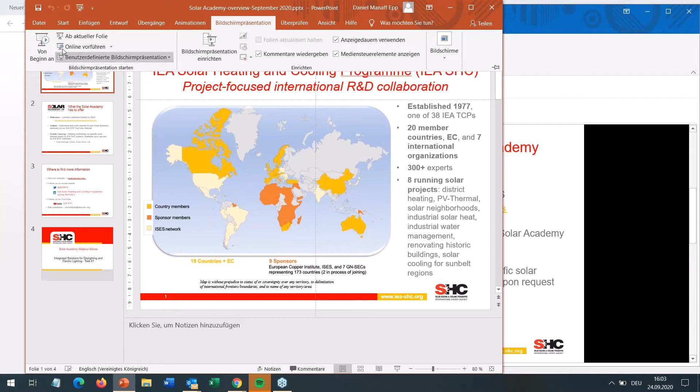The IEA Solar Heating and Cooling Program is a collaborative research platform, really huge, with over 300 experts from around the world, from 20 member countries, the EC, and 7 international organizations. We have currently 8 running research projects, and they cover a wide range of topics which are all linked with efficiency and solar energy. It's district heating, PV thermal, solar neighborhood, industrial solar heat, renovation buildings, solar cooling for Sunbelt regions.

What we offer as Solar Academy is regular webinars. They are hosted with ISES. You hear one today, and you find all the recordings of previous webinars under this link. Also, we offer videos on the YouTube channel, which we have done with experts on conferences or around Solar Academy webinars. And we offer on-site training available on request by IEA Solar Heating and Cooling member states. And the last trainings were in China, South Africa, and UK.

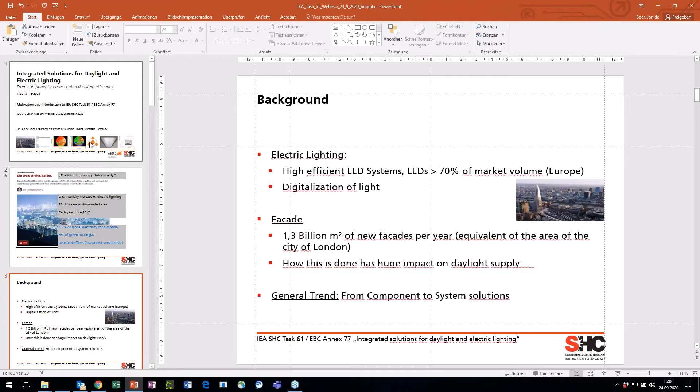Okay, I assume it's visible.

Yeah, it's my pleasure to introduce to you today this 3.5-year work program of IEA Task 61. Let me first of all start with lighting in a little bigger context, bigger picture.

We still, like with other resources, see that lighting consumption is still growing, that there is an intensive use of lighting. From satellite images it has been deduced that we still see huge increases since 2012. One study showed that we have 2% intensity increase of electric lighting and 2% increase of illuminated area on a global scale, so showing that this is still ramping up.

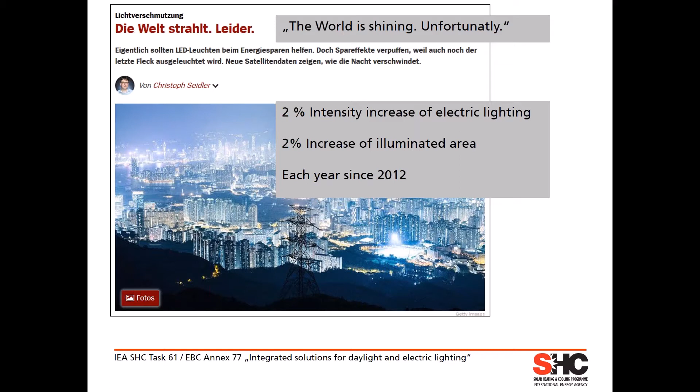We know, if we are relating it to the energy consumption, that for lighting we need around 15% of global electricity, and also that lighting accounts for around 5% of greenhouse gases. So lighting and energy efficiency definitely is a topic we have to look into.

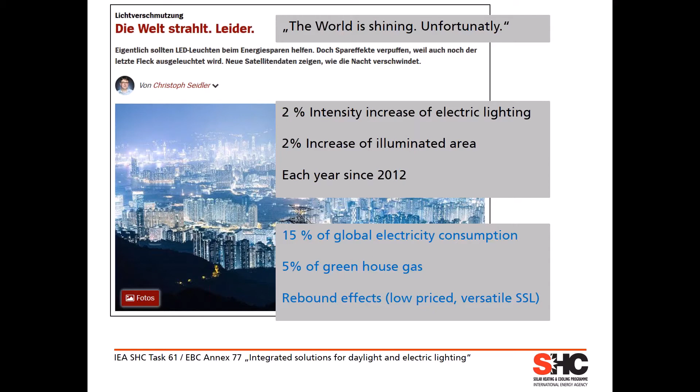Looking a little into the market, we all know about very efficient SSL systems, LED systems now around, but nevertheless we are seeing worldwide so-called rebound effects. Low price and very versatile LED systems are being used more and more, in parts compensating the efficiency gains we got. A little on the background of the markets we are in.

It's on the one hand side electric lighting. We went through a transition of technology here, around 70%, an estimate of market volume now in Europe in LED technology, replacing, of course, older technologies. We have an efficiency boost here, LED systems around twice as efficient as the formerly used fluorescent lamp systems.

And now the next step in electric lighting is very much into the digitalization of light. So you're getting more features, more functionality in parts for less money. So it's a very dynamic change and transition we are in here currently.

The other aspect we're dealing with is the facade, and thereby the facade influencing the daylight supply in buildings. In the facade market, we are having around 1.3 billion square meters of new facade put up each year. That's an amazing number. It corresponds to the area of the city of London. So that is being put into place year by year. And this, of course, has a huge impact on the daylight supply and therefore the lighting conditions in interior spaces.

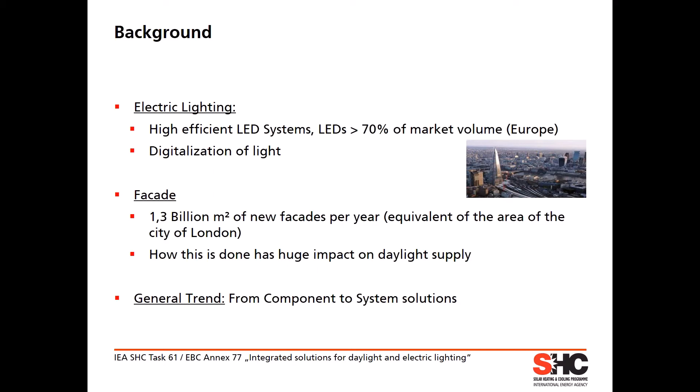Generally, we see the trend that we are moving from component development more into system solutions, trying to optimize the integration of different components, and that is bringing us to basically the topic of our working program: open issues in the integration of day and electric lighting. That is addressing user aspects, energy efficiency of these combinations, the technology side, and also market aspects for industry, but also for design practice.

Just to give you a couple of ideas which we addressed in the beginning of this activity to have a closer look into, is definitely the side of the user perspective. We are seeing changes in design and control parameters as we are understanding better and deeper that we not only have to meet visual but also non-visual effects. When we're designing lighting installations, we have to tailor lighting systems to different ages of users of spaces, and this of course has implications that we have different and additional targets in lighting designs.

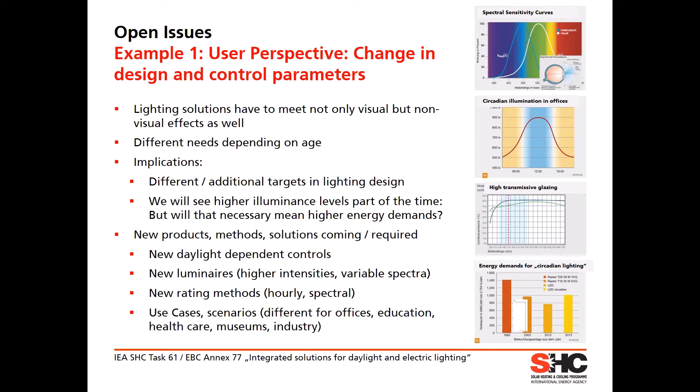For instance, we might see higher illuminance levels part of the time in the future in indoor spaces, that is going along with the question if we necessarily need higher energy consumption for this, or if we can solve it smarter by, for instance, using more daylight. It has implications on new products, methods, solutions coming up, new control strategies, new luminaires, or also new rating methods we are seeing coming up.

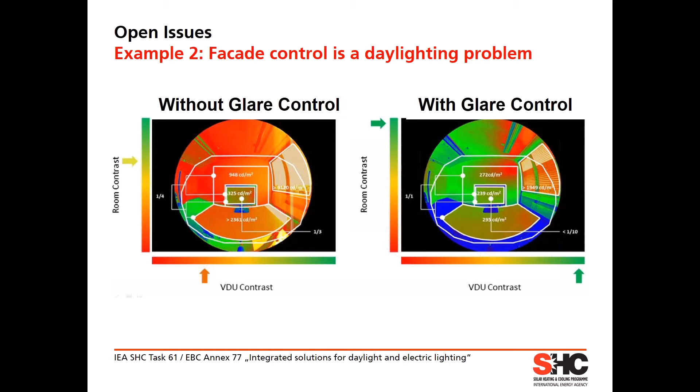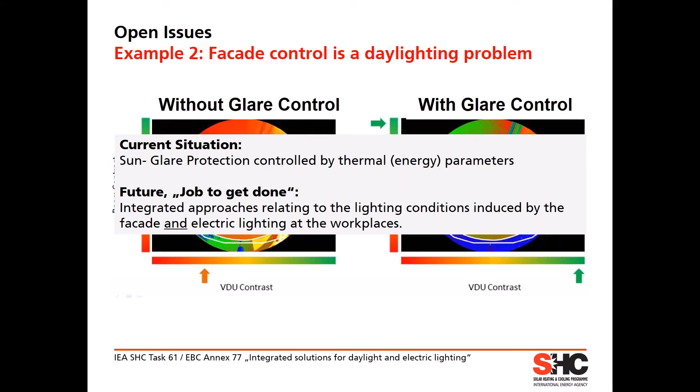Another issue is the integration of lighting environments in indoor spaces, bringing together the light coming from the facade through the sun shading, through the glazing systems with electric lighting. That has up to now very much been driven from the facade side by solar controls, and lots of studies show that when people are actively switching their facades, their sun shading systems, they are doing it for lighting reasons and not for thermal reasons. So the job to get done is to integrate these approaches better and bring electric and daylighting aspects better together at workplaces.

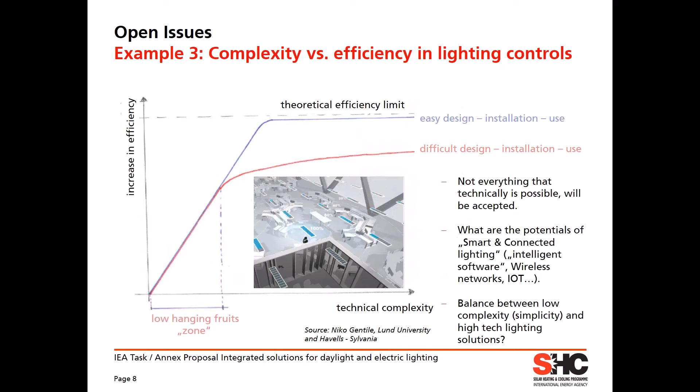The third issue is on the technology side. Today we know that we have technically quite many solutions at hand. Almost everything is technically possible, but will that be accepted? So the key question here is whether technical complexity also increases efficiency. If we're having a difficult design, difficult installation, and difficult use due to not really matched technology, will that in the end be more efficient than something very easily designed, installed and used? So in the end, something very simple could be more efficient and better accepted. So we think that is worth looking into.

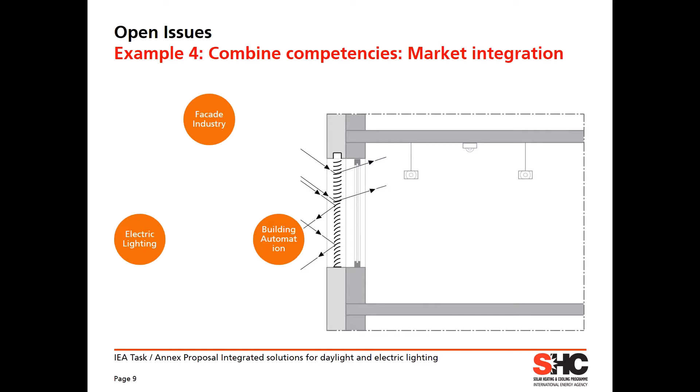Another aspect is on the market side. We are having different industries involved in lighting. That is on the one hand side, of course, classical electric lighting, the facade industry, building automation. And we see in the buildings more and more things, components being connected. We are seeing new function integration, for instance, in facade, not only delivering daylighting, but also delivering electric lighting. And we think that if we bring these different trades and industries better together, we can generate quite some added values.

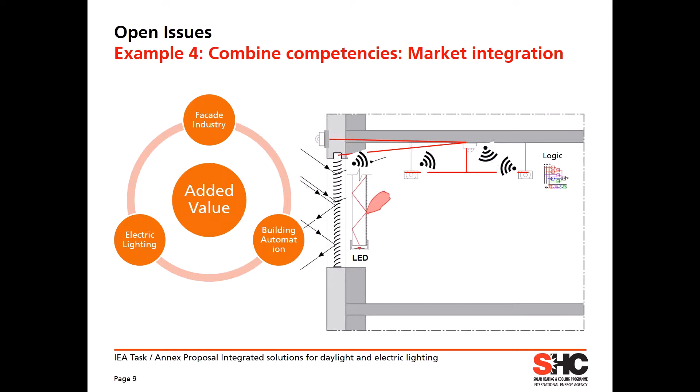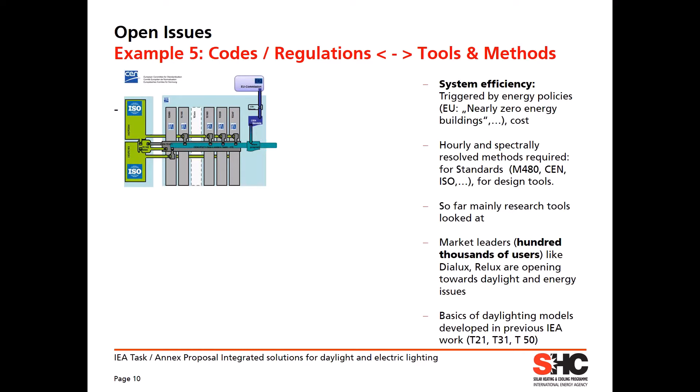In addition, we have to bring it out into the design processes up to the desktops of practitioners, and also put that in the context of national regulations. So quite a bit going on, for instance, on EU level and on national level, trying to bring down energy consumption as a whole. Standards are important for that, so we think that it's also worth working on developing standards further, better connecting day and electric lighting aspects, for instance, having methods rating things on an hourly basis.

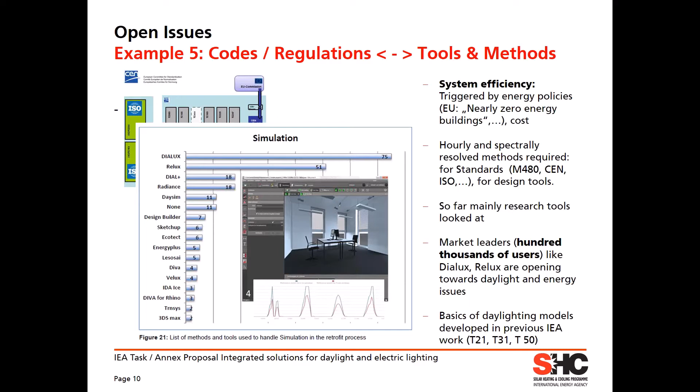And also important, the improvement of design tools, rating tools, that we possibly include the market leader with simulation tools here, closing gaps which are still existing on the daylighting side and on the lighting control side. So that's another aspect and issue we are looking at.

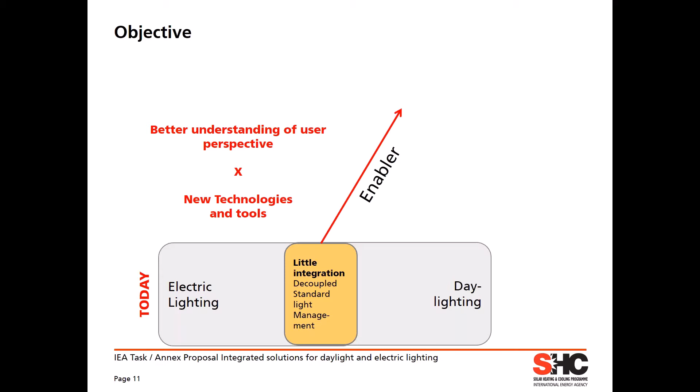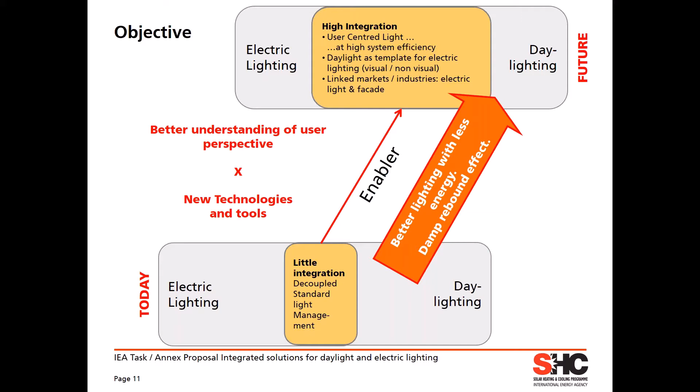Altogether, we are trying to push the integration of electric lighting and daylighting by using these enablers, better understanding of the user perspective and new technologies and tools around, and hoping that with our program we can contribute a little to a higher integration of user-centered lighting at a high system efficiency, implementing daylight as sort of a template for electric lighting solutions, and also linking market and industries better. So in the end, hoping to give a little push at least for more energy efficient lighting and damping these mentioned rebound effects.

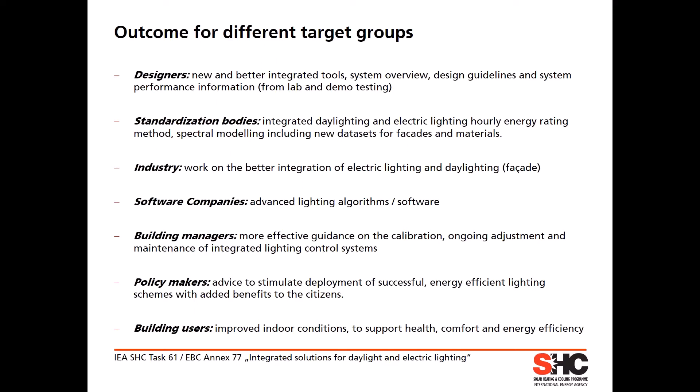So in the end, we are bringing up results, publications for different stakeholders, designers, standardization bodies, industry, software companies, building managers, policymakers, and hopefully in the end for the building users we can improve indoor conditions, can support health, comfort, and of course energy efficiency with this program.

To just give you a brief idea of who is behind this activity, Bärbel mentioned it's quite a big research group of around 35 experts from 14 countries, coming from research institutes and industry at the same time. We have early publications out, for instance, a position paper on the use of daylight in non-residential buildings, giving indications of actions eventually needed for governments, NGOs, private sectors.

We are having the first reports from the research program now out. More are coming up during the next year as we are in the final year, and also a newsletter being available. If you're interested, you are cordially invited to follow us on the website of Task 61. The publications which are coming up will be available and downloadable from this site. And of course, keep in mind to use light intelligently. So thank you very much.

Thank you, Jan. I think you gave us a great insight into how complex the field of lighting is, which we use every day, even between research and practitioners. Thank you so much. We will have questions at the end. And that's why I can already introduce the second speaker to you, which is Barbara Matusiak. She is head of the Energy and Environment Group for the Norwegian University of Science and Technology and professor of the Department of Architecture and Technology. She's a trained architect, and her presentation today will look into user requirements for lighting environments. So Barbara, please, I'm looking forward to your presentation.

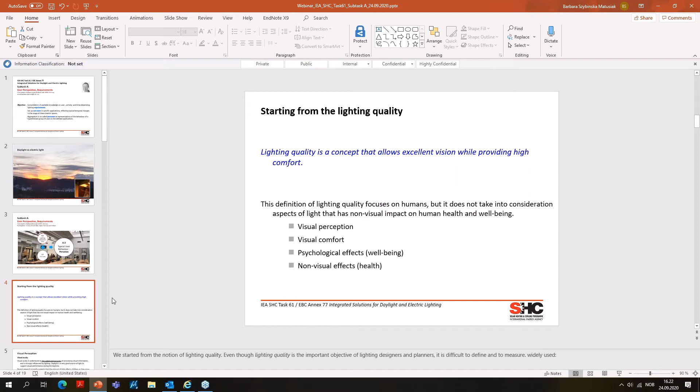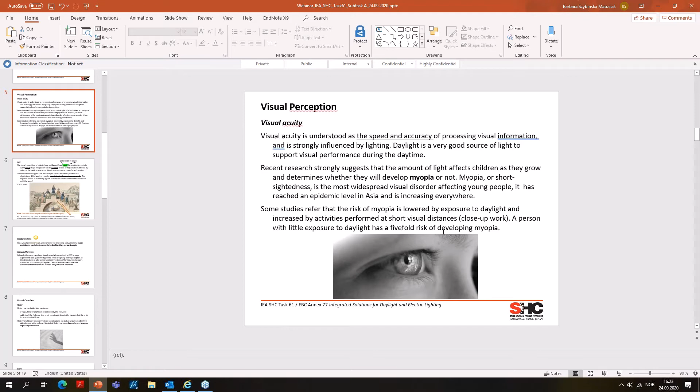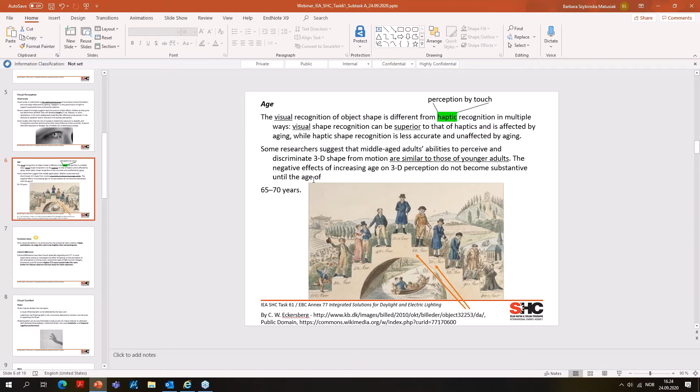What we learned about age. The visual recognition of object shape is different from haptic recognition in multiple ways, and visual shape recognition can be superior to that of haptics, and it's affected by aging, while haptic shape recognition is less accurate and unaffected by aging. Even though some researchers suggest that middle-aged adults' abilities to perceive and discriminate three-dimensional shape from motion are rather similar to those of young adults. So the negative effects of increasing age on 3D perception do not become substantive until the age of 65, 70 years.

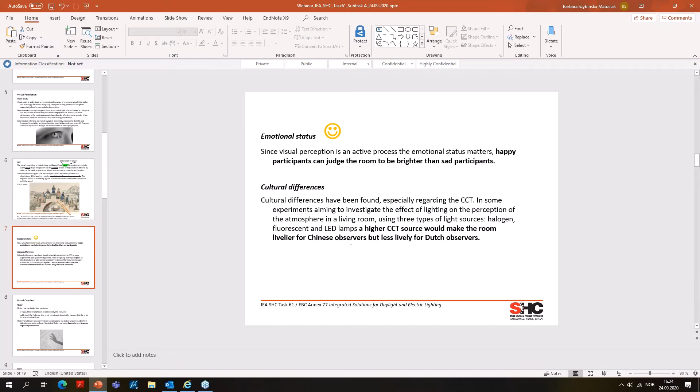What about emotional status? Yes, since visual perception is an active process, emotional status matters. Happy participants can judge the room to be brighter than sad participants. And we found cultural differences, especially regarding the color temperature of light. In some experiments aiming to investigate the effect of lighting on the perception of the atmosphere in a room using 3 types of light sources, a higher color temperature source would make the room livelier for Chinese observers, but less lively for Dutch observers.

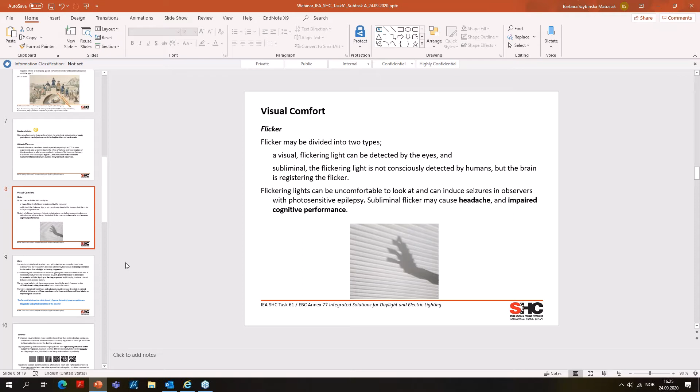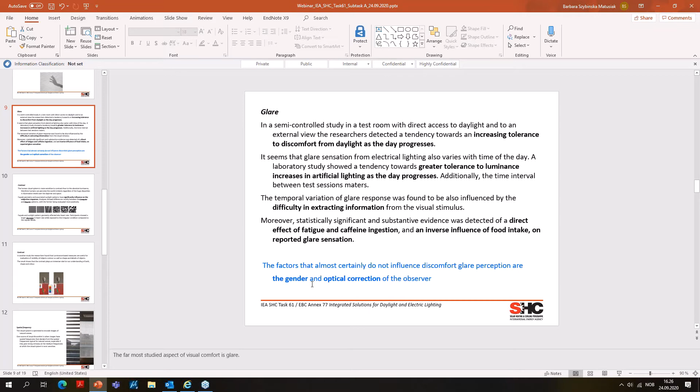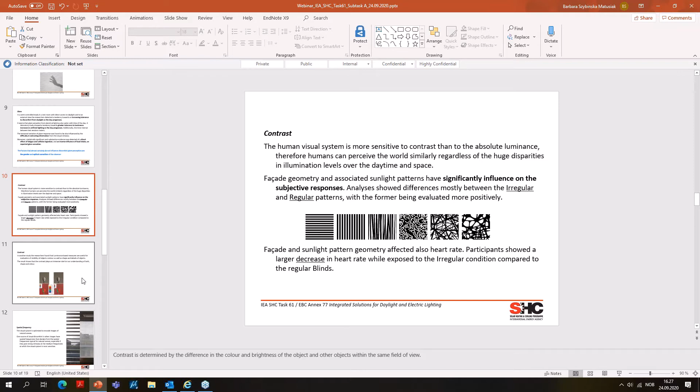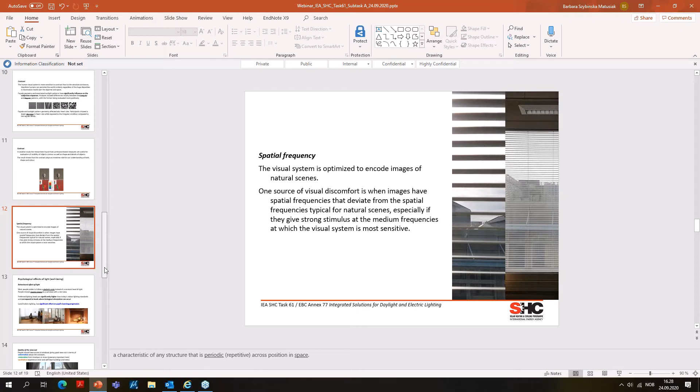Contrast can be measured by luminance ratio, and we can look at spatial frequency. The visual system is optimized to encode images of natural scenes. So one source of visual discomfort is when images have spatial frequencies that deviate from the spatial frequencies typical for natural scenes.

And then we can look at the behavioral effects of light, how people use it and what sort of lighting they prefer. And we can again repeat that people should have access to windows giving a view because of information, restoration, and aesthetic issues. And the window size should not be limited, not only because of limiting the view, but also because window size has an effect on spaciousness, openness, pleasantness, excitement, and legibility and coherence of the room.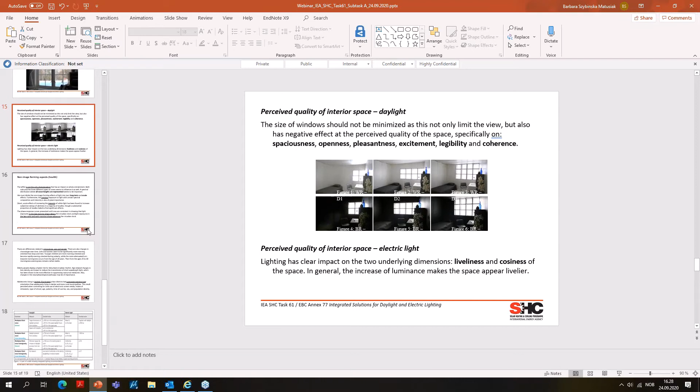So I also have quite a long series of information about non-image forming aspects. Maybe the most interesting is that there are differences related to chronotype, age, and gender. There are also changes in chronotype over time. Girls and women seem to be significantly more morning-oriented than boys and men. Young children are more morning-oriented and become rapidly evening-oriented during puberty, while a more attenuated turn toward morningness occurs from the age of 20 years, and it's more stable. And elderly people display a high risk for disturbed circadian rhythm.

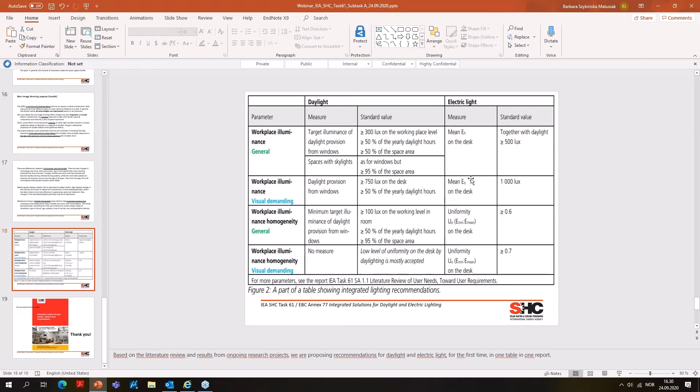So, based on the literature review and results from ongoing research projects, we are proposing recommendations for daylight and electric light for the first time in one publication and in one very long table. Here you see a part of the table: we have daylight and electric light, and for example, workplace illuminance in general, what the recommendations are, and for electric light as well, for visually demanding tasks, and so on. So I recommend it if you would like to know more about human needs and recommendations. The report, A1 as we call it, will be published very soon, probably already in October. Yes, thank you very much.

Great, thank you, Barbara. Very impressive, very nice to see lighting and health being linked by researchers and even looking into gender aspects. Thank you very much. Well, our next speaker is Mark Fontoynont. He is professor at the Danish Building Research Institute at Aalborg University in Copenhagen. He is a real expert on new lighting techniques, and he will share with us today his insights on simplified maintenance and improved user friendliness of these solutions. So please, Mark, the floor is yours.

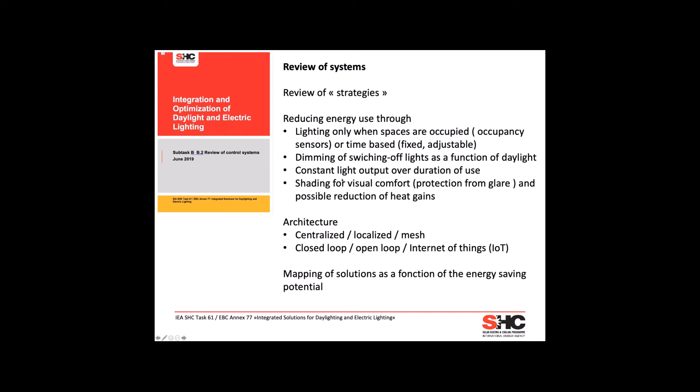They also expect compatibility with BMS, building management system, and also wireless, which is attractive because this means less wiring for installation. We are reviewing systems. I don't want to cover all that. I know some of you, or most of you, are experts in that. So you know the supply is impressive, from centralized system, closed loop, open loop, the type of sensor you're using.

We are reviewing also the market structure, depending if it's residential and non-residential, which are very different markets for the application. And you have drivers like in individual buildings, very much related, for example, to security issues. Often it's much more related to heating problems, overheating, whatever, and lighting is just a second aspect. So it's hard to really fully link the control technique to only lighting quality. It's a bit more global in buildings.

We also see movement and changes, a lot of protocols of communication, and this shows that lighting control is part of a more global system. And often if you have a very well developed BMS, the lighting control is only part of it and could be cheap with few sensors. So you have a whole range of control, from fully dedicated to lighting to completely integrated in BMS.

And now with the data architecture coming in the buildings, the data system like PoE, Power over Ethernet, can even light the lamps. We have two IEEE standards on this PoE 100 watt system, and also the single pair approach, which we expect will also put prices down for controls. We see some initiatives for DC powered lamps, 48 volts, which allows transformers to be centralized and not at every light source. New sensor systems and chips with geolocalization can really adapt lighting to your area.

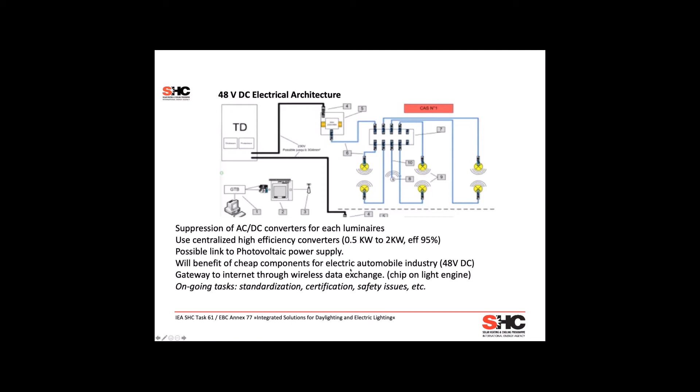I don't want to go too much into all these new proposals of architecture. It's moving. I think some of you are probably involved with photovoltaic systems, and photovoltaics produce this DC current, usually rather high voltage, but there are a number of actors that think that part of the building could be powered with DC power. And we have also pushes from the companies working for the automobile industry, especially the electric cars, with components that may move to the building from the car industry. So we're checking that very important evolution which is happening.

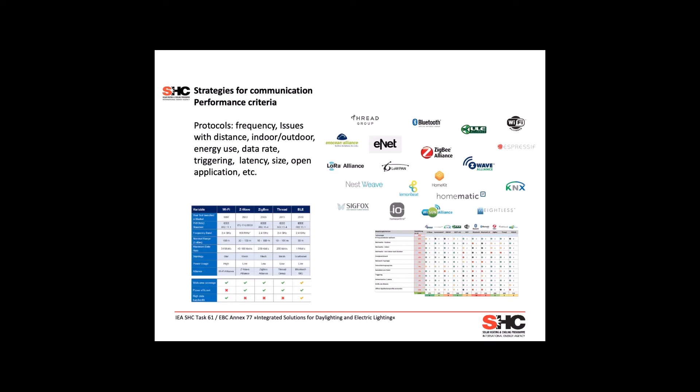We looked at a number of performance criteria of all these systems, with the protocols, with the advantages and drawbacks. We also look now at the future trends, and for the future trends, we have an analysis based on value creation. Part of these lighting control systems are basically solving problems today, and part of them are also creating new values, new functionalities, new opportunities to run this better. So this is something we have absolutely identified.

And it's impressive to see how the market is pushing for development of new systems in a global manner. I talked recently with the people working in the car industry and the electric car industry, which is very much driven partly by software development. And you could see now that software is also moving into this lighting control business to make things versatile, practical, remote control, flexible. I have a number of terms here, and that's something we look at, and we report in our next report on B3 and B4 actually.

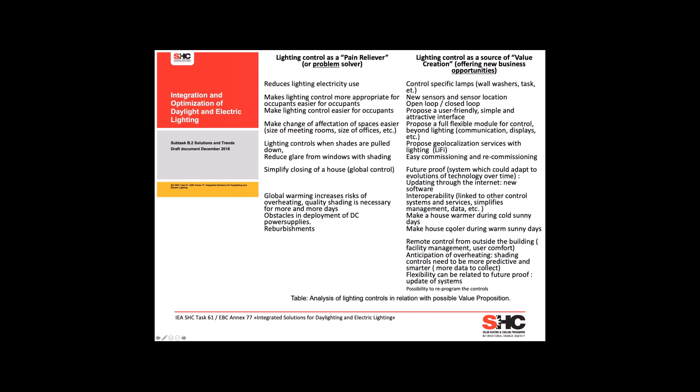We are covering user interfaces, and what is happening is impressive. We have the classic analog controls, the switches that you all know. Now you have more and more digital aspects, which are on screen, could be on the wall, on your smartphone, on a tablet.

And we see also mixed hybrid systems where you can mix control while turning or having a physical interaction, but also having parts to communicate with colors, whatever. It's impressive what is happening in this domain, and I think it's very creative. It could simplify the world, making a global management of, let's say, buildings, hospitals, schools, or commercial centers, or your home, more practical, but also we're very concerned by the robustness, the simplicity, the commissioning, the maintenance.

Components are progressing, are being shared, and we check the trends on that. We try to really look at what the systems are really doing for energy savings, because the motivation often is very far from purely energy saving. So we want to inform the readers about the potential on that.

We see something which is not so developed, the combined control of lighting and daylighting. It's not really the big heart of this development, but we try to grab the systems that allow doing the two. And we look at the evolution of motors, of shading systems, or electrochromic glazing, and the way they could be combined with the

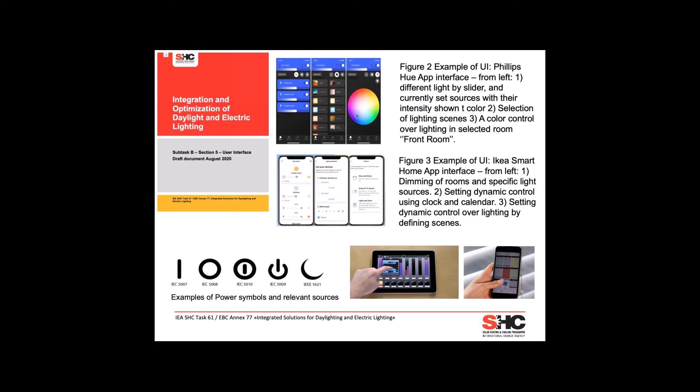So I'm continuing. There are very interesting interfaces, whether they are a niche market or they will be dominant. It's really on the target, and that's what we are discussing. We have global issues regarding that. To finish, this document is about the lifetime. The model of lifetime is very important because we are talking about systems with different lives: the control has a life, the drivers have a life, the lamp has a life, the luminaire has a life, and we are addressing this in the report too.

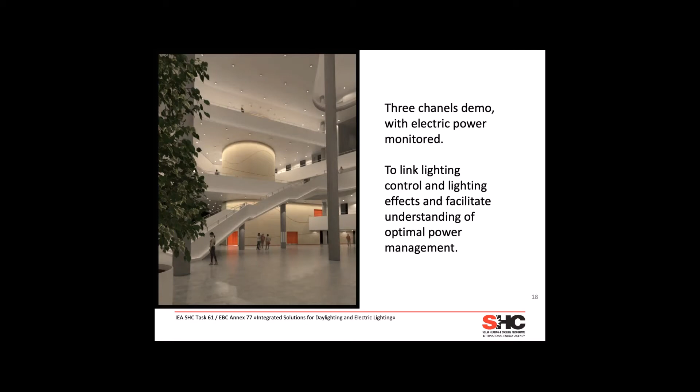And I think I will have, if I could play this on my screen here. I hope you can see that on my screen. Do you see my screen? I hope so. Maybe not. Yes, we see your screen. Okay.

So you see, you can vary the daylight in the room. We have different lighting scenarios. You can play up and down, and you can actually simulate graphically a number of lighting control systems. And we plan to have a number of lighting control systems demonstrated on the website of the IEA Task 61. Okay, this is where we are now. 5 reports. Some of them are coming soon, and we hope you will be delighted to have them and review them. Thank you very much.

Mark, thank you. This was a very engaged presentation and very impressive work. I think it might be 500 pages of technical insights on new lighting technologies. Very well done. So our next speaker, I welcome Dr. David Geisler-Moroder. He is project manager and head of competence field daylight in the R&D department of the Austrian company Bartenbach. So we switch now to a more practitioner-based speaker. His topic today is design support for practitioners related to simulation workflows and daylight systems characterization. So please, David, the floor is yours.

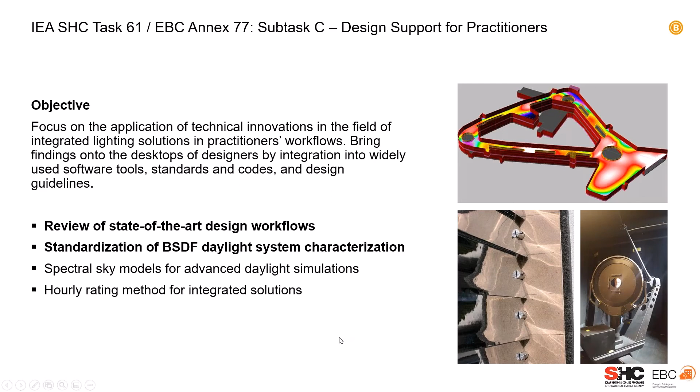For the design workflows, what we did in that state-of-the-art review, we first defined example design projects to give the reader an overview of how such buildings, how such architectural designs can look like, and how the lighting design with integrated solutions for electric lighting, daylighting, and controls do look like, and what different applications can be. So we have 3 different and very nice examples in there.

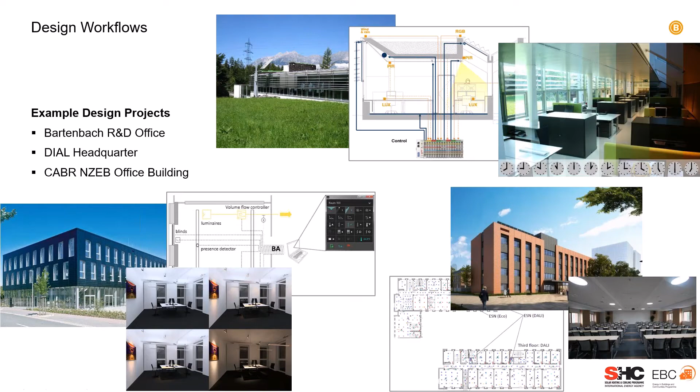It's our R&D department here at Bartenbach in Aldrans. We do have the office building from DIAL in Germany, and the building of the Chinese Academy of Building Research, the Net Zero Energy building in Beijing. In a second step, we gathered inputs from different groups and different people joining the group about the used workflows in practice, as well as proposed workflows in standards or from public entities.

So we, for example, have workflows that we use here at Bartenbach. We have workflows that are used e.g. by Norconsult, at Inform Design, at DIAL. But we also have workflows described that are standardized in the ISO standard 16817, or, for example, proposed by the German LiTG in their scope of services.

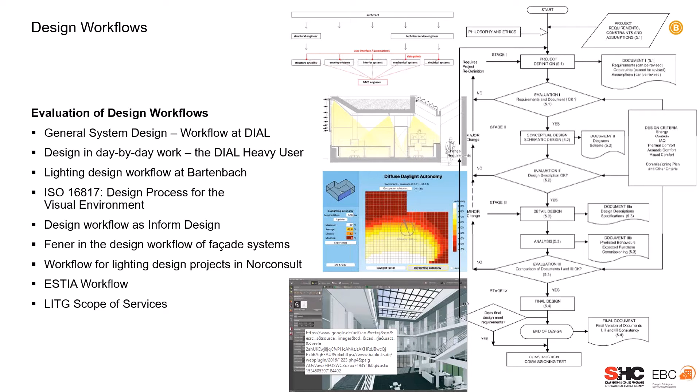As today, all design process and design workflow is tightly connected to simulations, which are either for evaluation in the end, but also often in the design process. If we think of parametric design, for example, they are an important means of design nowadays. We also took the time and compared and put them next to each other and checked the different features that design tools provide.

So there are quite a number of software solutions out there which can be used for designing daylighting and electric lighting solutions, and also the controls for these integrated solutions. And we did that for different aspects used in the design process and which are necessary for the design process. We summarized general information, which kind of user group can be or is addressed with the one or the other tool, in which design phase they can be used, and so on.

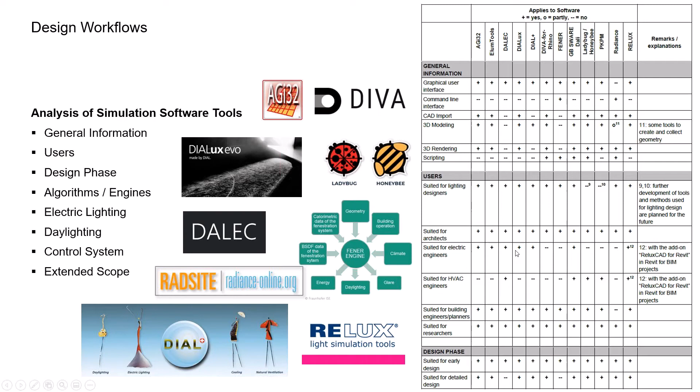So we put them next to each other and got a nice overview of the current situation in terms of software solutions. All that is put together in a report that is already published, that is already out there for all who are interested in more depth. It's more than 100 pages of information about the currently used workflows and software for the design of integrated lighting solutions, as the title of the report is, and you can find it on the webpage of the IEA Task 61.

My second topic that I would like to dig into is the characterization of daylighting systems. If we talked now about the simulation capabilities, there are some tools out there. They are already working with so-called BSDFs, which are a possibility to characterize daylighting systems in simulations. So quickly talking about BSDF, what is it?

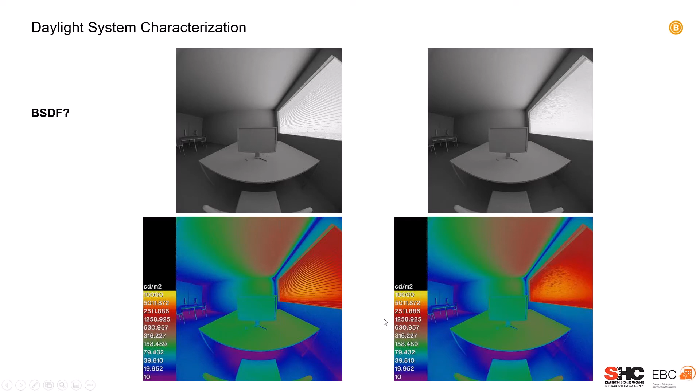So if we think about that, why do we need that? If we think about a very different area, as an example of cars, there's the certificate of conformity, which exactly describes how the technical characteristics of the car are. We do have the same for electric lighting. We do have IES or EULUMDAT files that describe exactly the lighting distribution from that luminaire that we have. And the same thing we do have with BSDFs, but we don't have a real standardization and a real standardized format for these kind of data yet.

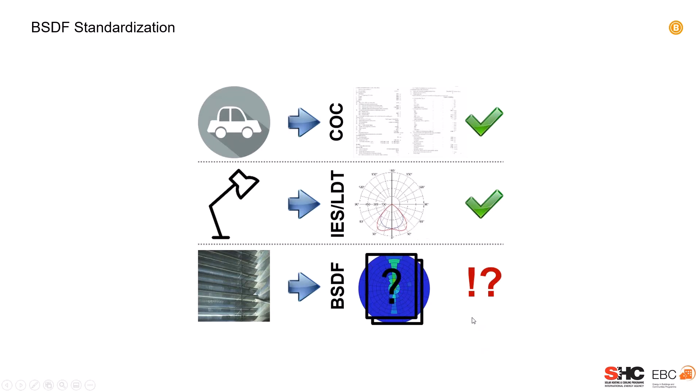The other thing is what I also mentioned, that we do have for electric lighting quite some simulation tools and quite some possibilities to do proper simulations. For daylighting systems, there are still quite some questions, and it did not find its way into the widely used software systems yet.

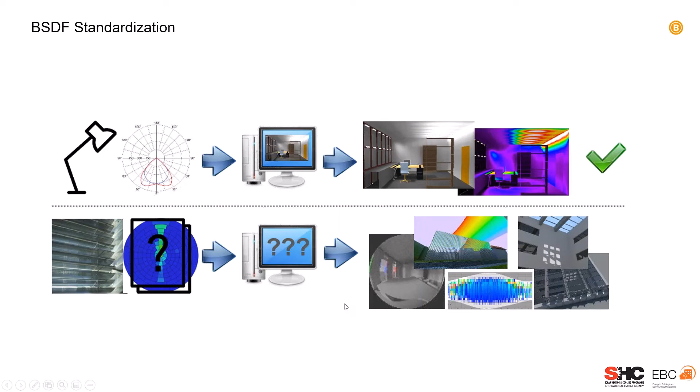So what did we do within the task so far? One thing we did is a sensitivity analysis to find out what is the necessary resolution of these kind of data sets for different kinds of systems and different kinds of applications. So for example, if we want to do an illuminance calculation, finding out the overall lighting inside the room, we will need some other representation than, for example, if we want to do a glare calculation, which is based on the luminance distribution directly seen at the window. So we did a sensitivity analysis on that to find that out for different kinds of systems, for blinds, for fabrics, for clear glazing, and so on.

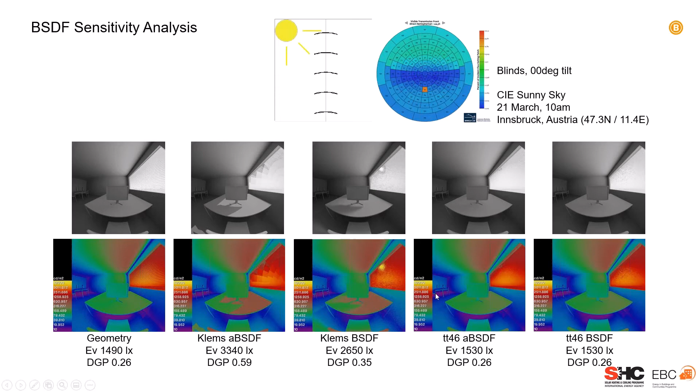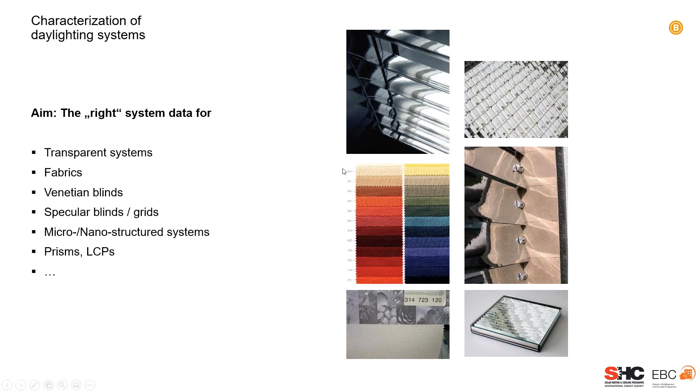And the overall aim is then from that to derive what is the right and the necessary kind of data set that we need for the different kind of systems. So for example, for transparent systems, for redirecting blinds, for these kind of micro shades, for fabrics, for textile roller shades, and so on. And this is an important step towards bringing that into the practical work, as we need to inform industry as well which kind of data sets and which kind of resolution they should provide to the designer, that they can properly include the systems already in the design phase and do the proper simulations for any application they want to show, may it be illuminance or glare calculations or whatever.

So what our aim in the end is that we come up with a proposal for different classes of systems. So this is now work in progress. We do have, for example, I took out this example, diffusing general Venetian blinds, which are widely used, especially in Europe. As I mentioned, for different tasks, for different metrics that we want to evaluate, we will need different simulation methods on the one hand, and these are then tightly connected to which kind of data sets and which kind of resolution of the data set we need to put into that model.

David, your 2 minutes are now starting. That's good. There are 2 more slides to go.

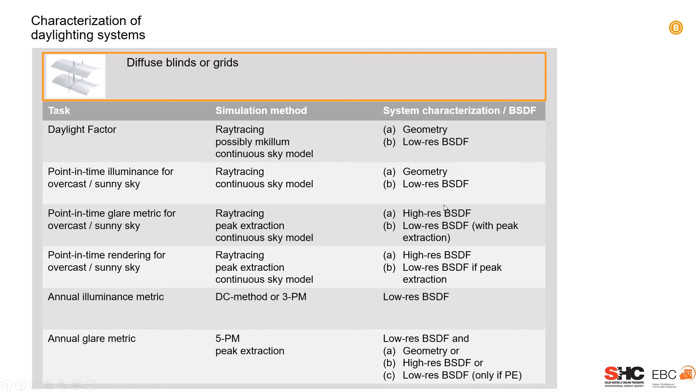So this is work in progress with putting these kind of tables, this kind of information together for the different classes, for different typologies of daylighting systems. So as I said, this is currently work in progress with the experts in that IEA Task 61 who are joining here. We do have quite a number of active participants from all around the world, from the USA, from Switzerland, from Germany, from China. They're following partly different approaches in the way they measure, in the way they generate those kind of data sets. But in the end, we are trying to put all these together to propose a good way and a good working possibility to come up with these kind of data sets and propose to industry which kind of data sets for daylighting systems to bring these kind of data also on the workplaces of the practitioners.

So we are currently working on this white paper. It is in a quite good stage already, so it will be released soon. We're currently having our IEA meeting in parallel, and we're discussing the last changes to that white paper. So stay tuned; it will be online on the Task website as well. Very soon you'll find it there.

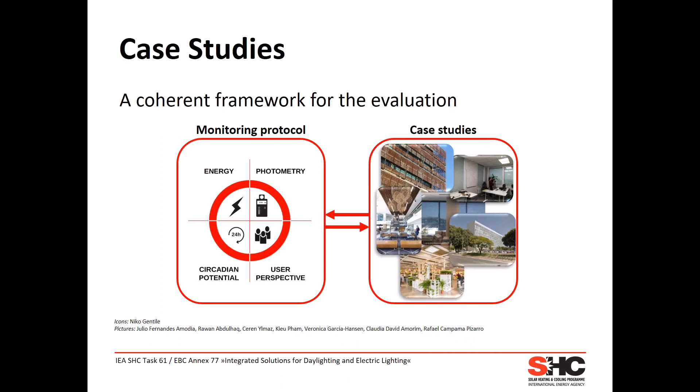Which are the case studies then? We have a long list here. It's a bit dynamic because we are looking at real occupied buildings. So in these times it is sometimes a bit difficult. So there are projects that are coming in, some that are going out. But in general, we have quite a nice geographical spread here. We have an overrepresentation of offices, but we also have healthcare buildings, educational buildings, some living labs, some retail sector. And we have a number of solutions that have been used here and that you will see.

Daylight harvesting systems, open loop, closed loop, granular lighting controls, electrochromic glazing, some special shading devices, low-cost solutions in listed buildings, and perforated facades, and I'm surely forgetting something. But interestingly enough, one of the solutions that is more used in the newest buildings and newest projects that we have is integrative lighting. Integrative lighting is a lighting system that is able to change in intensity and color throughout the day in order to support the circadian rhythms of individuals.

And how do we evaluate that? We have different techniques, and one of those is to try to log the individual intake of light in terms of both intensity and spectral power distribution. And this is best done with wearable devices. In some projects, we were able to get that. Werner, in particular, could test different devices that are now available on the market, and he will provide some lessons learned and experience from using different devices. So, Werner, the stage is yours.

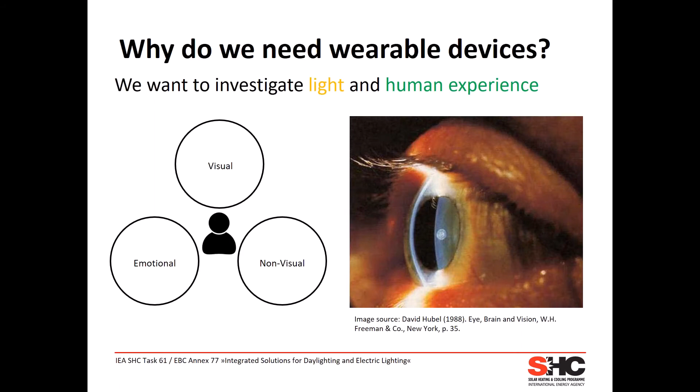Yeah, hello. I'm going to talk a little bit about these different wearable devices that we have investigated. We do this to link people's well-being with the integrative or circadian lighting in order to understand what people are exposed to during a particular day and how that might support their individual well-being. And this has to do with both the visual and non-visual aspects of lighting, but also some of the emotional aspects. So during the day, a person is exposed to different lighting conditions, whether it's at home or in the office or anywhere else outside in the buildings.

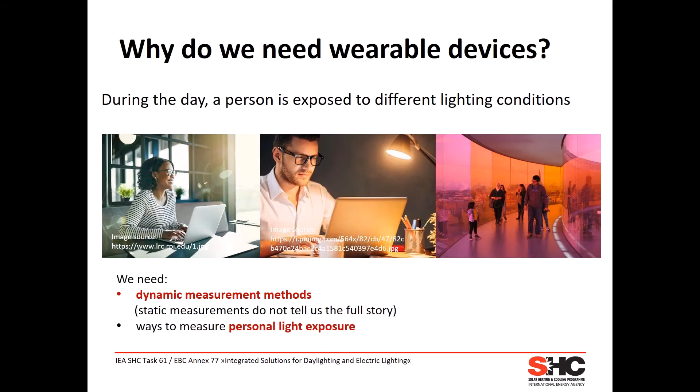And we need some dynamic measurement methods in order to evaluate that if we want to measure the personal light exposure that a person experiences during the day. What do we need in order to understand that exposure?

Because the spectrum changes depending on the lighting conditions, we will really need to understand what the spectrum actually is of the light source, how that spectrum contributes to our health and well-being. We also measure the photopic illuminance, the normal lux levels that you would measure at least, and we try to understand the different wavelengths if necessary as a compromise if we can't get the full spectrum of any particular light source.

And we want to correlate those photometric measurements with other human factors, for example, activity levels of people, to see whether it helps them sleep, for example, or if they're awake all night, or whether they can be energized in an office by a particular lighting system.

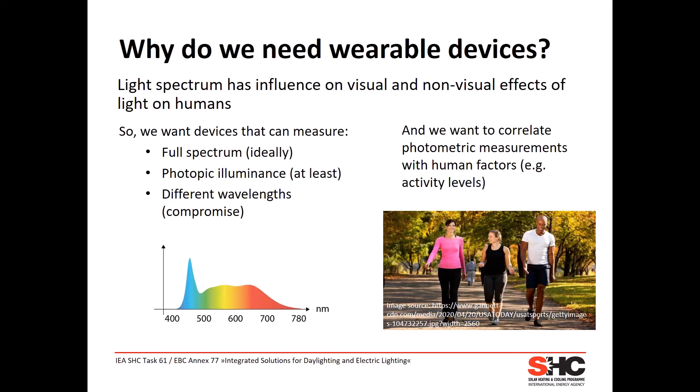We did use this for some projects and also other people, for example, at Markvart's group in Copenhagen, they have used Actiwatches, 48 of them, and have found that the calibration needs to be device specific. It does not come with specifications or calibrations from the manufacturer, so we really need to look at that. We have done some very quick tests here ourselves.

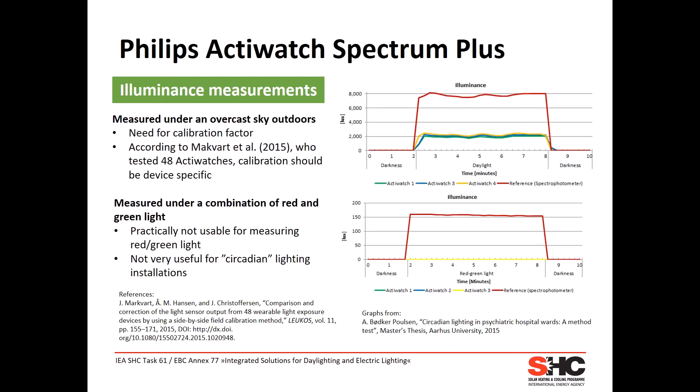And then at nighttime conditions where we had only red and green light in a psychiatric hospital where we wanted to avoid exposure to blue light to get people to sleep, we essentially did not get any useful information out of that. So we need to be careful with some of the measurements that they can actually do.

In relation to activity and sleep analysis, you get some graphs out of the Actiwatch in terms of the actual intensity of the activity, and then the program software suggests some period where it is actually sleeping or resting and indicates that, but it's not very reliable because you often need to combine it with some other information.

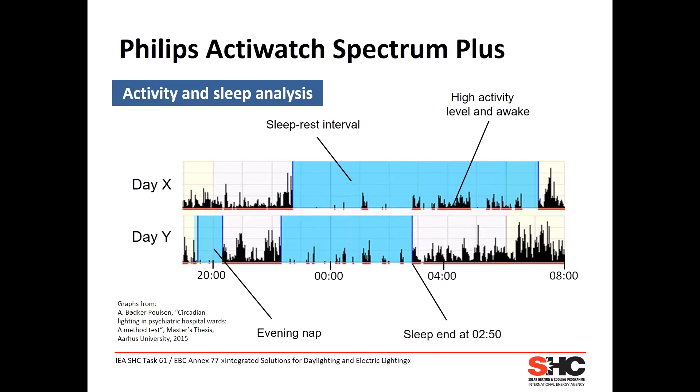And one of the examples that we had, for example, that a person was sitting on an exercise bike for quite a while, actually almost 3 hours, and moving with every body part but the wrist that was actually holding on to the handlebar. And only because of one of the nurses observing this person for quite a period of time did we know that the person was not sleeping, which the software had suggested, but that the person actually was on the exercise bicycle, but the hand was not moving because of being fixed to the handlebar.

Another thing that we use... You have your 2 minutes left now. Sorry for that. But I don't know. Okay.

Yeah. And we use the LYS button, another tool which allows us to track similar things, which is much smaller and it is closer to the eye. But again, we had some issues with reliability. They were very sensitive to orientation.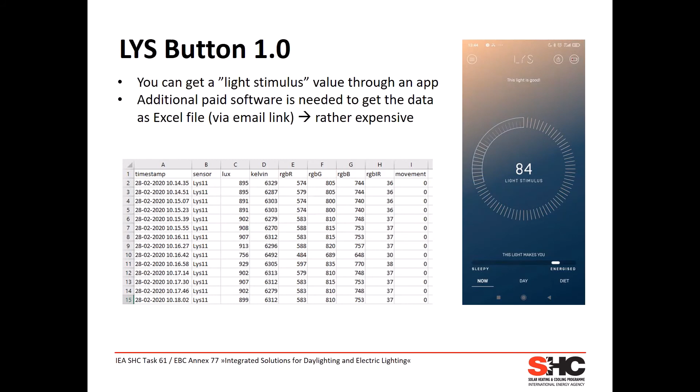And you can get on your screen on a mobile phone a light stimulus, which we don't really know what the value shows. If you want to get more data out of it, for example, the RGB and infrared channels and color temperature, you need to buy quite expensive software, which is used for that. And we can also see that the calibration of these is rather difficult.

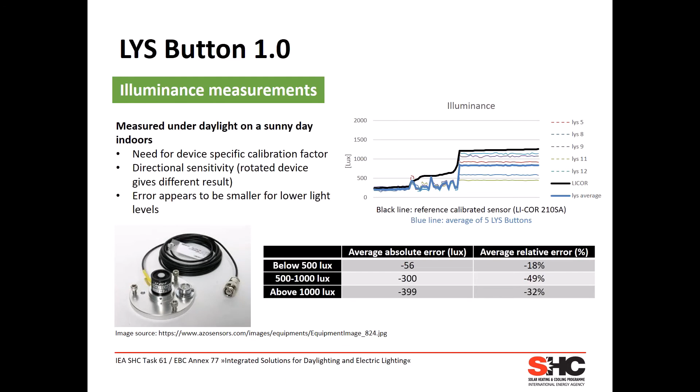Different LYS buttons measure very different levels. And if you turn them around on your shirt or something like that, you get very different values again. Color temperature is one of the good things with that. They're rather close. And in terms of activities, it measures something in relation to acceleration, which is expressed in G figures.

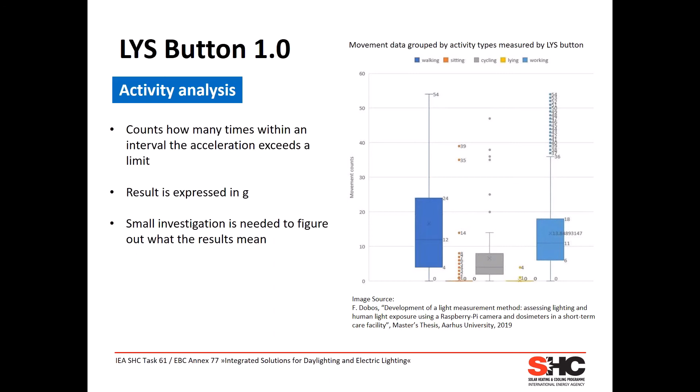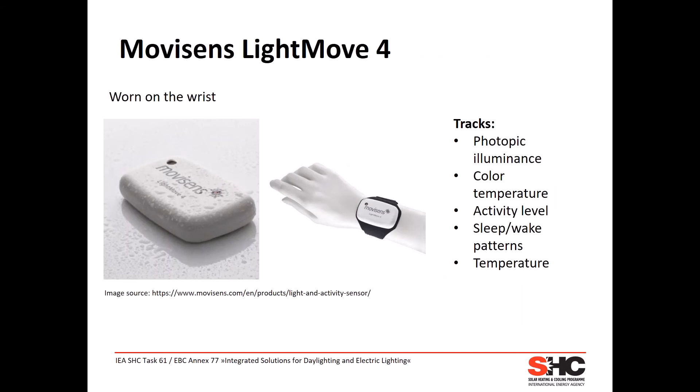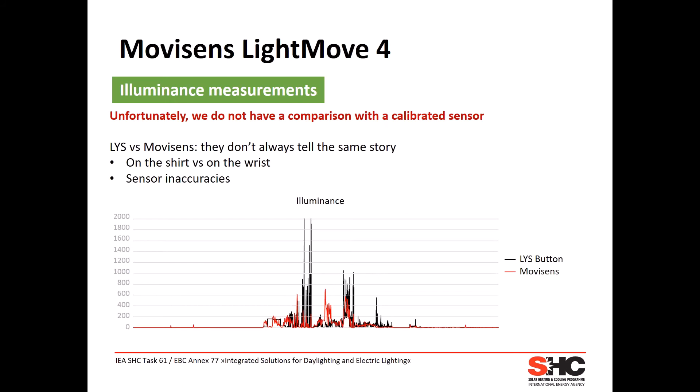The Movisens was also worn at the wrist, and it covers photopic illuminance, color temperature, activity level, sleep-wake patterns, and the temperature. And there we also compared it with the LYS button, and they were quite different, although theoretically they should measure the same kind of activities. And when you try to link it with your activities and what it's recording, it's a good idea to also have a diary where you write down what you were actually doing at the particular time, because with the Movisens also being worn on the wrist, this can be quite misleading at times.

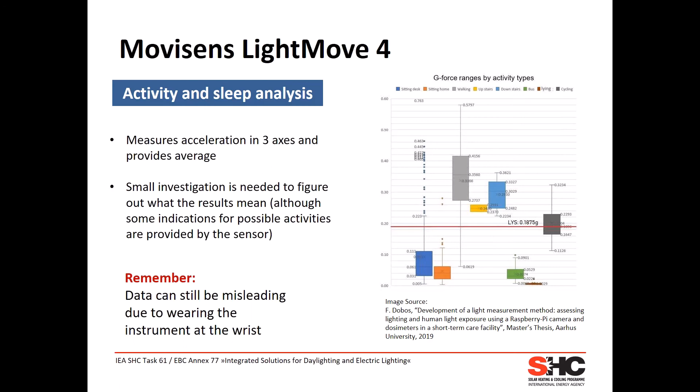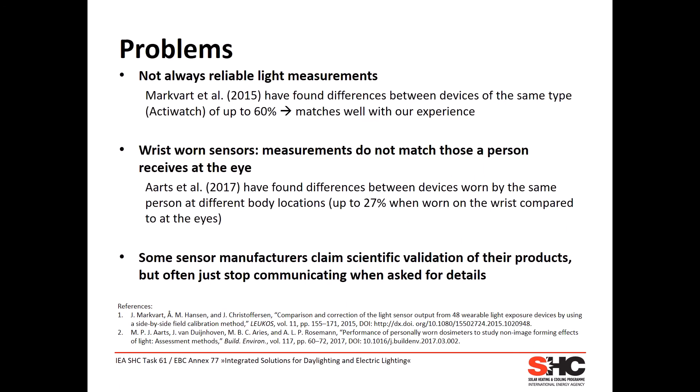So some of the problems that we've found are that they're not always reliable light measurements. Markvart et al. have found that the differences can be up to 60% for the same exact type of ActiWatch. And that matches quite well with our experience that we have very large differences between the same type of equipment. With wrist-worn sensors, it does not match the light levels that the person actually receives at the eye. And there were also around 27% differences between what is recorded at the eye and what's recorded at the wrist. And some sensor manufacturers claim scientific validation of their products, but they stop communicating when you ask for some of the details. So that's a bit tricky to actually confirm.

So what do we recommend? If you can, use more than one type of measuring device and compare the results. Try to calibrate all the instruments before you use them against a calibrated sensor, because it's not supplied by the manufacturers. But as researchers, we would be very prepared to work with the manufacturers on developing some procedure for that, but that may increase the cost of the devices. We should select sensors which are closer to the eye and facing the same way, rather than things at the wrist, which might also be covered by clothing at times.

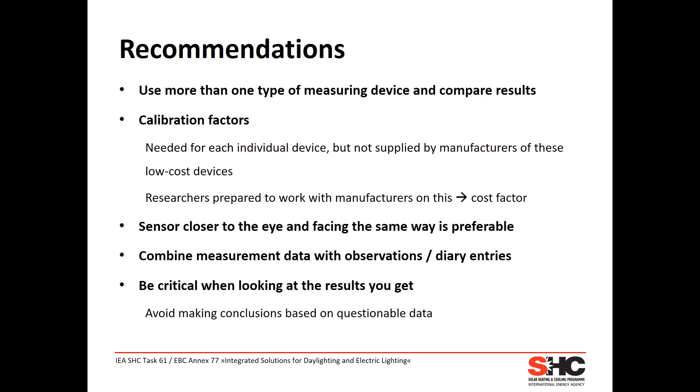We should try to combine measurement data with observations or diary entries, and we need to be extremely critical when looking at the results that we get. So avoid making conclusions based on some data which may be questionable unless you can confirm it with some other aspects. Thank you very much.

Good morning, everybody, or afternoon, I'm not even sure. What's your timing? Well, yes, we have some interesting questions, actually. Some of them were already raised yesterday. I think they are worthwhile being asked again while you type in your questions as well.

I know there had been 19% in some publications around, but from official sources you're getting from the UN, it's like 15%. Definitely, those are estimated numbers, hard to get true statistics from the different countries worldwide, but we don't actually see a decrease in energy demand for lighting yet. Although we of course have more efficient technologies with LEDs around nowadays, we mentioned those rebound effects and those growing economies, which are partly explaining that.